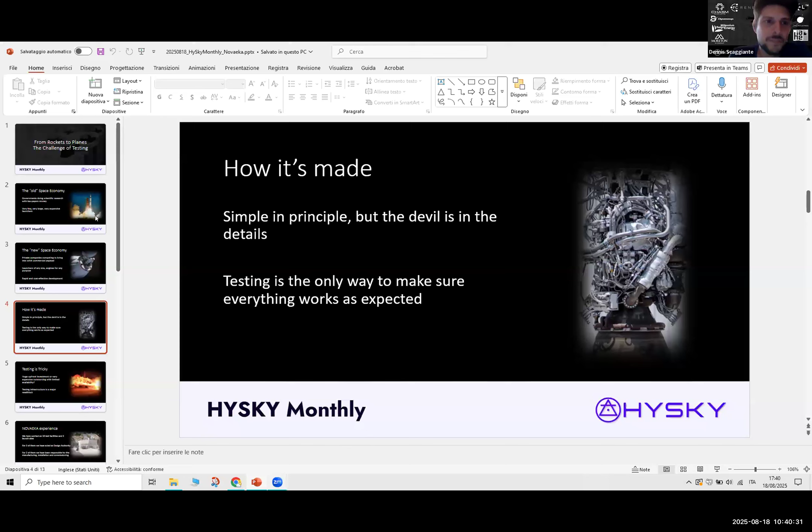So the topic of my talk would be from rocket testing to basically testing special components for aviation. And I'm gonna talk a lot about space in this talk here because it's what we do primarily.

For a long time, access to space was just for governments doing scientific research with taxpayers' money. The main objective of sending stuff or people into space was the exploration of other planets and doing scientific discoveries. So basically, up to 20 years ago, the space economy was very limited and almost exclusively dominated by governments. Governments gave contracts to private contractors to develop technologies that then were used by governments themselves.

In this context, it's only natural that there were just a few very expensive launchers, launch vehicles, and each one was essentially controlled by a different government. The launches were very sporadic, very expensive, and the payload was almost always of scientific nature.

Everything changed when companies like SpaceX proved that it was possible to dramatically reduce the launch cost, thus opening the opportunity for using space for commercial applications. The commercialization of space has led to an exponential increase in the number of satellites that are put into orbit and an exponential increase in launch service demand.

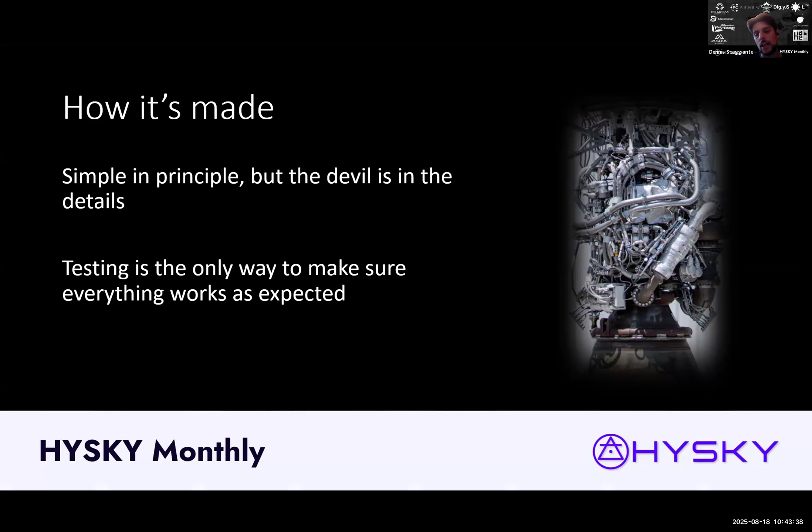The principle behind a rocket engine is pretty simple, to be fair, but the reality, the devil is in the details, so the reality is very, very difficult. The physics that takes place inside an engine is so complicated, non-linear, extreme that all the simulations in the world cannot replace the value of real life data. So testing a rocket engine is absolutely a priority, but it is a major roadblock.

So there are basically two ways you can go to tackle this problem. One way is just investing the money required to build your own proprietary test infrastructure. This is often difficult for new space startups to justify to their investors and can be a serious challenge. Imagine you have a team very focused on developing a very complex product like an engine, and all of a sudden you want to do real tests, so you have to invest time and money to develop a completely different system, the testing system, and so you have to defocus your activities, and face lead times up to 18 months to get a facility from design to commissioning to up and running.

And so it's a serious bottleneck.

The other way, of course, is outsourcing. There's plenty of institutions that provide high quality testing services. You have NASA in the US, we have DLR in Europe, and they work perfectly for maybe final acceptance testing or qualification testing, but they suffer a lot from these problems. The first one is low availability. If you are lucky, you can get maybe a couple of testing months per year, at least here in Europe. And this is way less than needed, especially during the design phase of an engine.

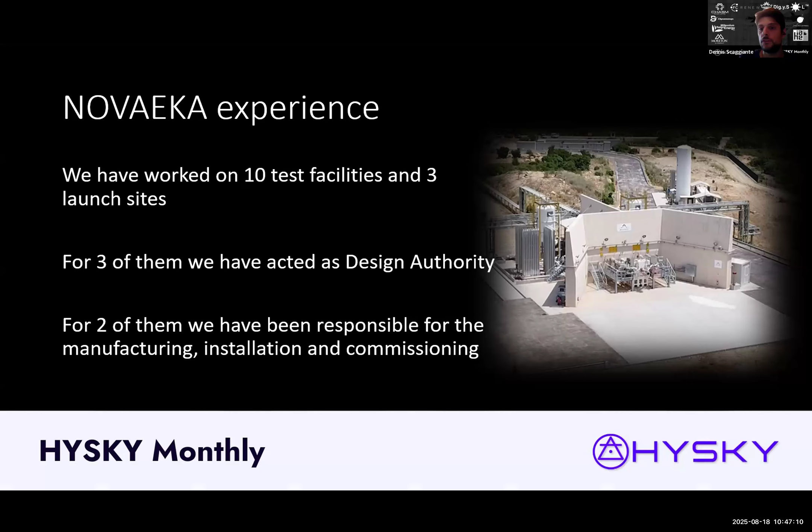For 2 of them, we have acted also as general contractors for the construction, so we have taken the responsibility of delivering the finished product to the client. And we have also worked with systems for fueling launchers with cryogenic fluids. We have a good track record, and we have facts to show it.

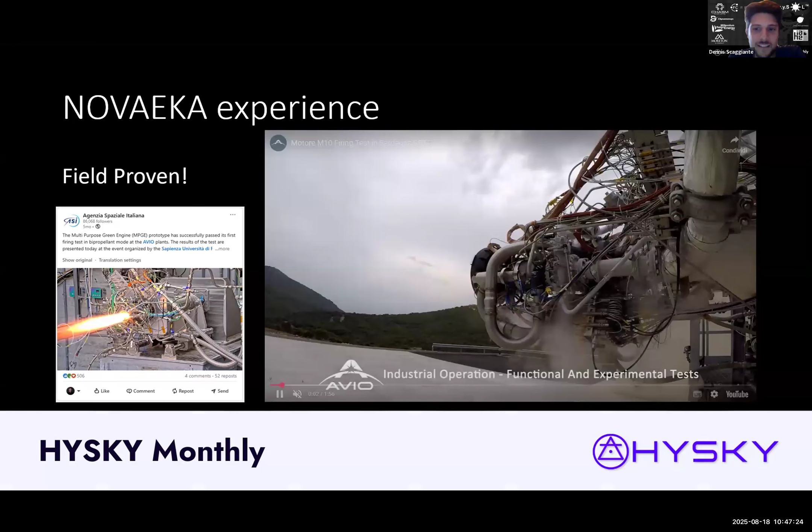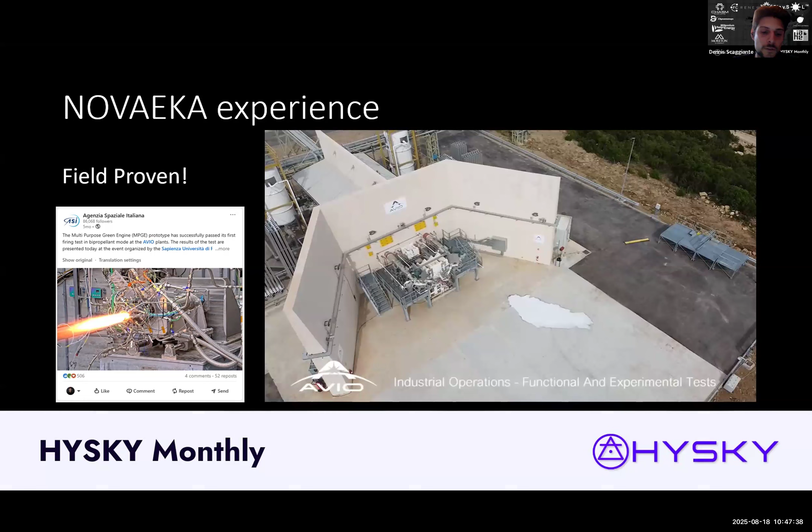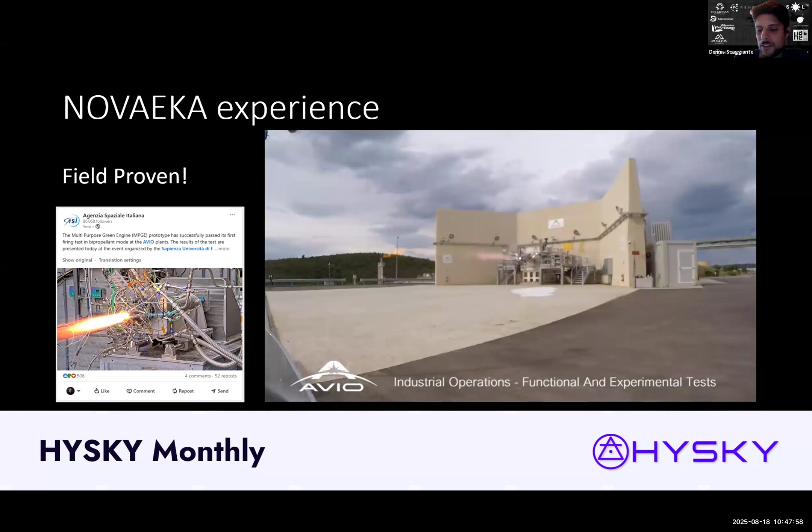So I'd like to show this little video of Avio. This test here is from a 100 kilonewton liquid oxygen, liquid methane engine, and it was tested in this facility that you see, designed by us in 2019 and 2020. So it's pretty cool to see it working, and it's pretty cool to see that the work we do actually ends up making a real impact.

So up until now, we have always focused and worked on specific requirements from each client. They give us requirements, we formulate a design, they review and customize it, and the facility gets built and done. However, after doing 10 of them, we have understood that there is a lot of space for standardization, and this could lead to a lot of cost saving.

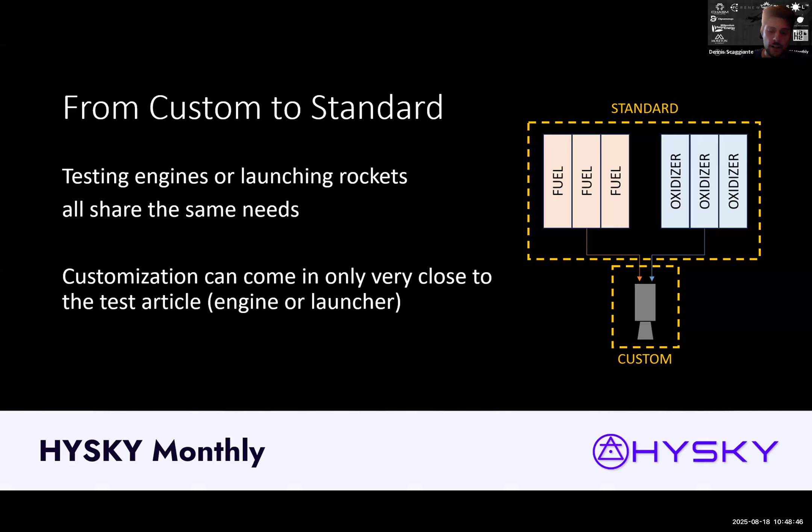If you think about it, all launchers or engines share a few basic requirements. They need a certain amount of fuel, at a certain flow rate and a certain pressure. And all of these basic functions can be standardized and made modular. Another great thing with portability: if you are designing and building a small engine, it would be ideal to be able to perform the final test before integration into the launcher, and to use the very same equipment you used for the development and acceptance testing.

If instead you are building a launcher, it will be very nice to be, let's say, spaceport independent, so being able to launch from every spaceport out there around the world, and you could take your equipment with you to refuel your launcher.

Putting all of these together, this is our solution, at least the idea we have: a portable modular fluidic subsystem that can be assembled to create a complete testing facility, as shown here in the slide, or with minor modifications, a fueling system for launches. The idea is to transform something that now is really time consuming and expensive to have into something that is almost an off-the-shelf component.

And we are working on this. We have two potential clients in Europe. One is an engine manufacturer, and one is a launch manufacturer. And we have also one potential client in the US.

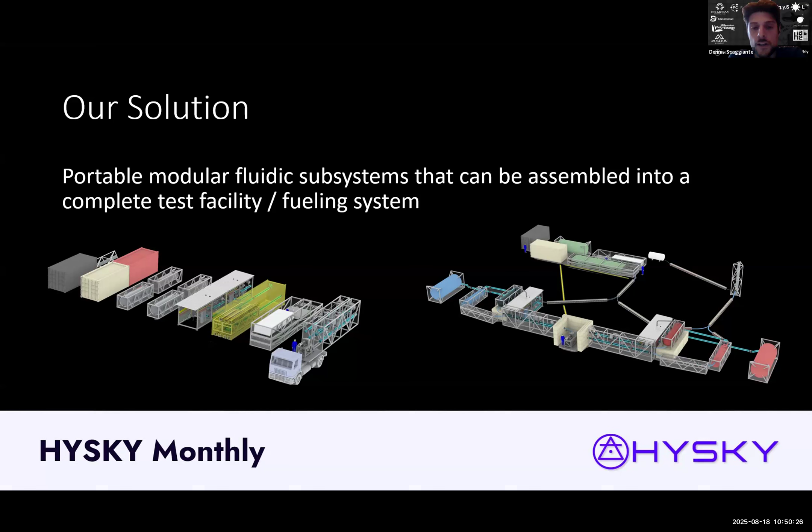So finally, we come to hydrogen. I didn't mention hydrogen anywhere so far, but the idea is very simple: do the same thing for hydrogen. So developing valves, pumps, or other kinds of fluidic equipment for liquid hydrogen or gaseous hydrogen requires a lot of testing. The scale of these tests is probably much smaller than we are used for the engines.

So that's for the better, because usually it becomes less costly. And the idea is the same: have a portable and modular testing equipment for performing tests on liquid hydrogen or gaseous hydrogen components. We are actually already working on something like this, and the render there is exactly the system we are working on for an Italian institution.

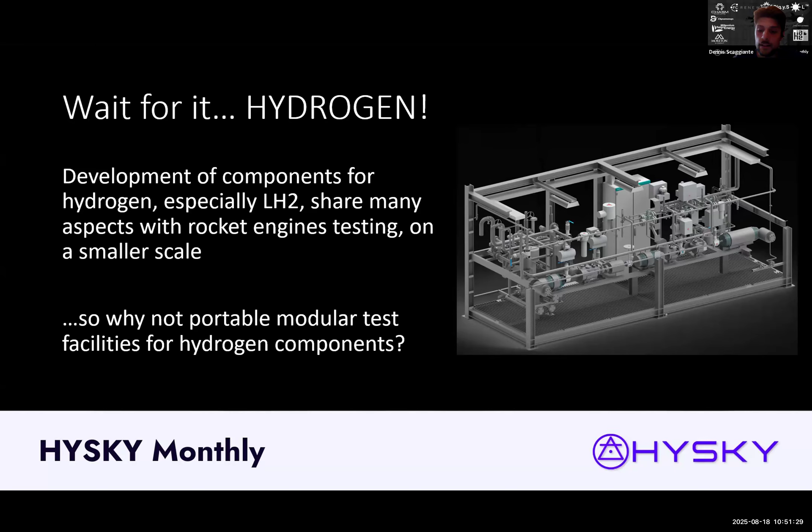So share your needs. If you have troubles with testing, and if you want to share with us some high-level requirements, maybe we could already have something that saves you a lot of time and a lot of money. So thanks.

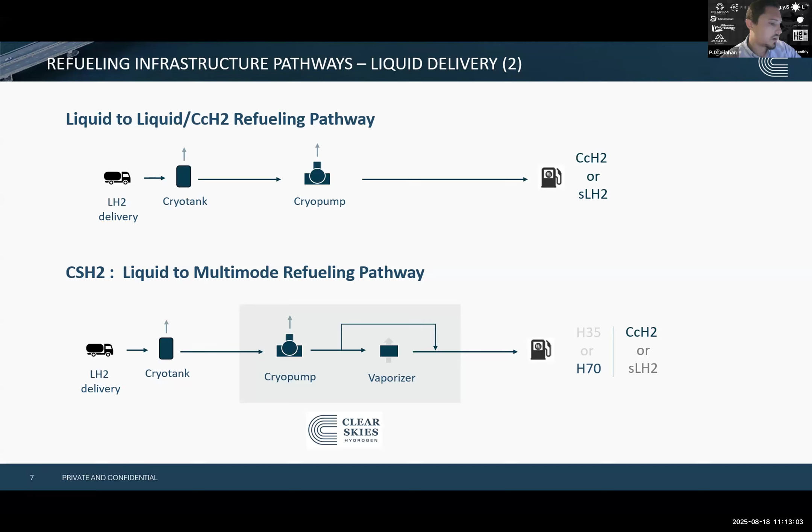As I mentioned, scaling the offtake for hydrogen has always been really challenging, largely due to these fuel costs. Right now, many of the small fleets are using distributed gas in the form of tube trailers. When we would set up prototype demos back with CTE, that's often how we would run things. If it's one or two vehicles, you'd get a tube trailer and just dispense that right into the vehicle, or you could use a compressor as well to squeeze a bit more out of that tube trailer. But really, it's small scale levels of equipment, and it gets really expensive once you start looking at getting a delivery of these trailers every single day to keep your fleet running.

To give you a sense of scale, one of these tube trailers can hold about a ton of hydrogen, enough for a few vehicles to run per day. But if you want to achieve more meaningful levels of scale, you're going to need liquid, which is four times the amount per load. So tanks carrying liquid can carry four tons instead, effectively cutting your delivery costs by four by using liquid.

And we see liquid as really kind of the stepping stone into pipeline gas eventually. In order to justify the build out of pipeline gas infrastructure, we need to achieve meaningful levels of deployment and industry scale on the vehicle side, which we think liquid is really key for, sitting right in the middle between tube trailers and the pipeline infrastructure down the road.

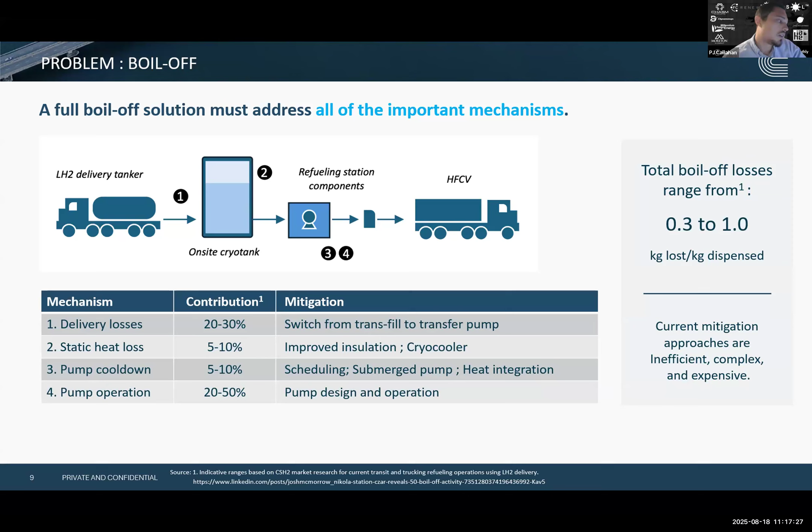Collectively, we're estimating a significant amount of hydrogen is lost, between 0.3 to a full kilogram per kilogram dispensed. So almost 50% of the fuel coming in is being lost through one of these four mechanisms. That depends somewhat on station utilization, but that's why you have such a large range. This is a significant amount of fuel, and it's really driving fuel costs up for the liquid hydrogen market.

So we at CSH2 are developing technology to attack some of these core issues of boil off with a purpose-built clean sheet cryopump design, going after mechanisms 3 and 4 initially that are due to the cool down and operation of the pump itself. We've designed a purpose-built cryopump specifically for operation with liquid hydrogen. It's designed to be low cost and very easy to maintain to overcome limitations of current pumps, with significant reduction in CapEx and OpEx.

Combine this with our direct fill architecture approach, and we can dramatically reduce the station footprint, going from a concrete pad that would normally take up 100 by 50 feet or so - we can shrink all that equipment down into a 20-foot shipping container. This also dramatically improves station flexibility and cuts down on construction timelines, making it possible to establish a networked approach of standardized fueling stations.

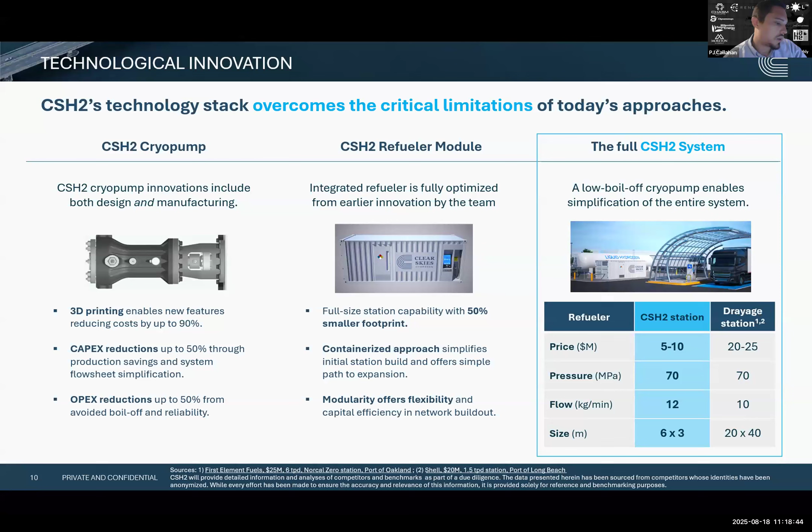With this approach, we think we can get a full station down from between 20 and 25 million, as we've seen some stations creeping up, down to about 5 to 10 million. There's a significant reduction in capital expenditure when you eliminate the cascade refueling, the refrigeration units, and purpose-build your cryopump. There's quite a bit of savings we can see.

And then finally, we're going after the transit and trucking markets initially, as they have the highest TRL on the vehicle side, with operators very eager to adopt, especially with the regulations in California for transit operators. But we are very eager to explore other applications as well.

So we can fill those tube trailers I mentioned that can support small scale demos in 900 bar or 500 bar, and our equipment's very effective for doing that. You can tap into the existing liquid hydrogen infrastructure to refill those trailers, supporting applications where they may not have space or power for a permanent station - you can set up tube trailers and do initial demos of vehicles or other equipment. We can also refill the CCH2 vessels directly as well. We're excited to explore some of these emerging markets for H2 delivery.

If there's any opportunity or interest in follow-up and discussions for partnership in any of these applications, we'd be happy to connect. That's all I had - thanks so much, and happy to address any questions.

Thanks so much, PJ, that was fantastic. I have a quick question - Mike, I'll call on you in just a minute. Can you go back to the previous slide? You probably explained this, but what is CCH2 and CSH2?

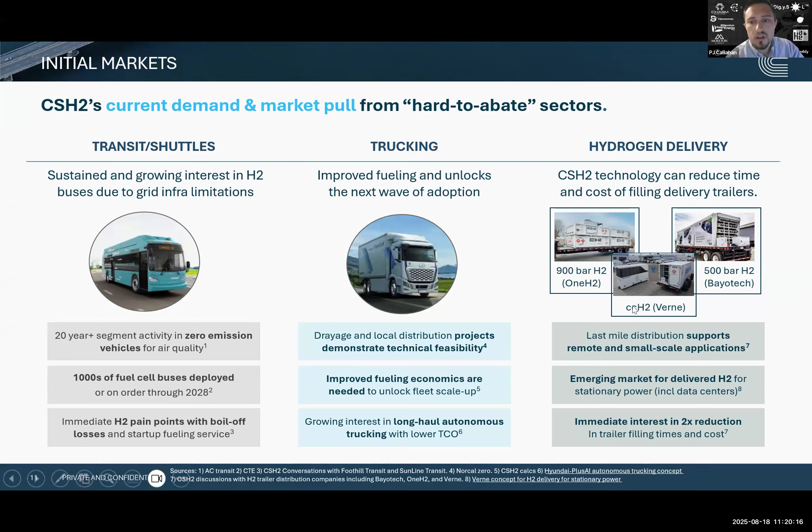CSH2, ClearSkiesH2, is just short for our company name. I said that in your bio. CCH2 - if I go back to the original slide here, it's probably the easiest way to explain it. CCH2 stands for cryocompressed hydrogen. Got it - so you see it referred to as number 3, cryocompressed hydrogen, a high density form of hydrogen that's very cold.

So, 54 Kelvin, and high pressure stored at 350 bar.

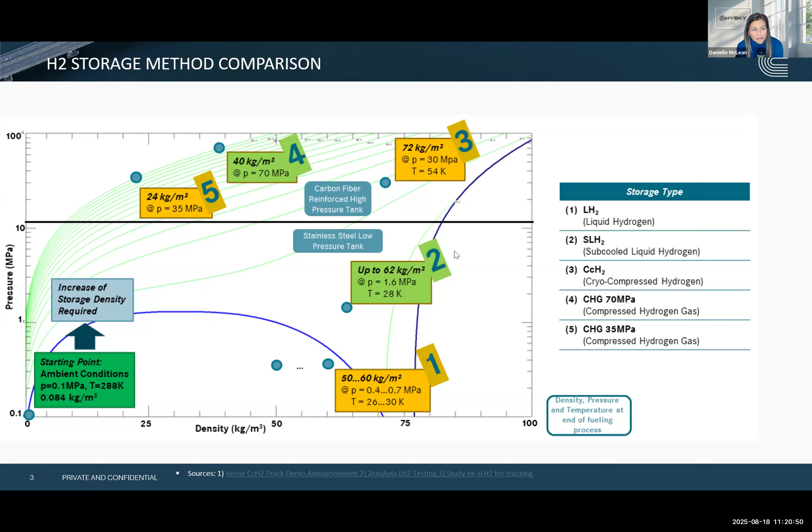Is Verne working on this? Are you guys partnered with them? I noticed they were in one of those pictures, I thought I saw them in one of your slides. We are exploring opportunities with them, to directly fill from our pump, the outlet of our pump, into their vessels.

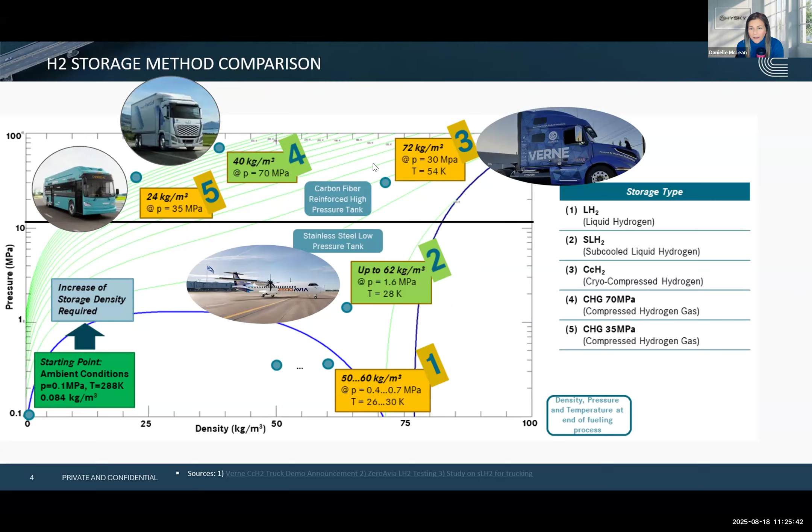PJ, could you go back a couple more slides? I want to make sure I understood something you said. Keep going back—it's the one where you talk about the pipelines. Oh, here?

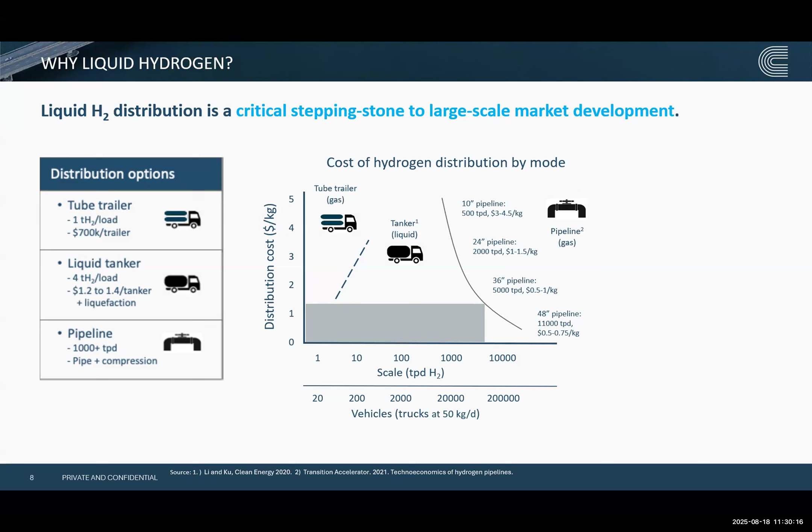Definitely. So the simpler the station, the cheaper it'll be from a capital perspective. The first design is really a legacy design, from before we had developed a lot of our cryopumps. This is what a lot of stations look like, where you vaporize the hydrogen coming out of the cryo tank and then put it into a compressor. Compressors are very expensive to operate and can be somewhat unreliable at larger scale.

The second option moves towards a cryopump, which is a little more effective for liquid itself. But the key cost driver here is the cascade storage and refrigeration units, which take up a lot of space - and the storage tanks take up a lot of space too, which is additional land cost. The refrigeration is very costly and can also be pretty unreliable from what we're seeing.

So if you take those out using smart controls on your cryopump - being smart about the way you use the discharge from your cryopump - you can blend the streams coming out of the vaporizer and the pump itself to use some of the cooling duty of the hydrogen coming out of the cryopump. That's just a process design change instead of an equipment change, which is cheaper, so it reduces the effective fueling cost as well. This is a newer technique our co-founders pioneered at our last company. We don't see a lot of existing infrastructure using this type of technique yet, but it's one we're integrating that we think will dramatically shrink the station cost and footprint.

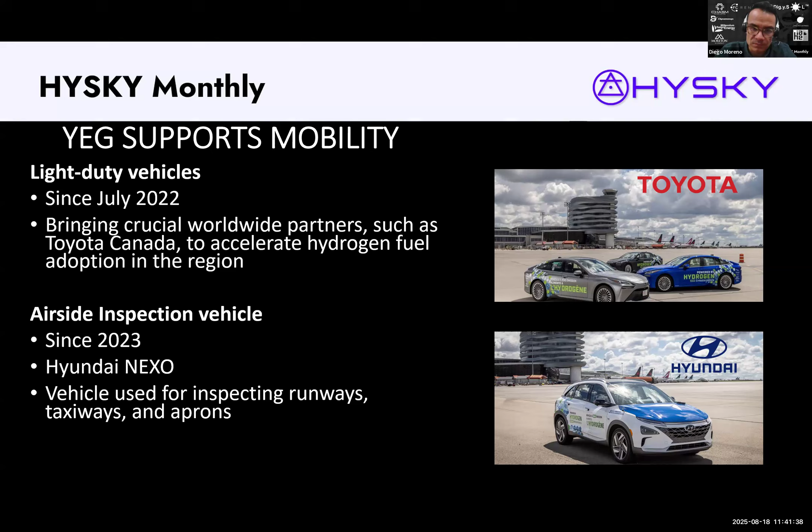As well, we have our hydrogen refueling station. This is a temporary one, through a partnership with Air Products, a very reliable hydrogen production technology provider that we have around. And that is something very important.

We have seen, and we know, that there are a bunch of very cool technologies around, but they are at low TRL. And as you know, an airport can never fail. That means reliability is everything for us. So we need to have a plan A, B, C, D. You will never see an airport shut down because plan A failed.

So for us, we need to secure that the hydrogen supply is going to be constant and totally reliable. That's why we have this partnership with Air Products, and they have been very stable in terms of supplying hydrogen for us. Of course, we are identifying what the learning curve has been, and we are working on other projects in order to supply hydrogen from the land itself as well.

So with this hydrogen, it's gaseous hydrogen that comes in cascade mode. It's not the ideal one, as you know. So we have a very interesting project that we would like to expand further, but realistically, this is what we have right now.

As we know, liquid hydrogen is very expensive these days, and if we don't have a stable demand, that is the problem we have with mobility. So we need to minimize the risk, the financial risk, and minimize the cost. That is why, while adoption is increasing, we are working with gaseous hydrogen.

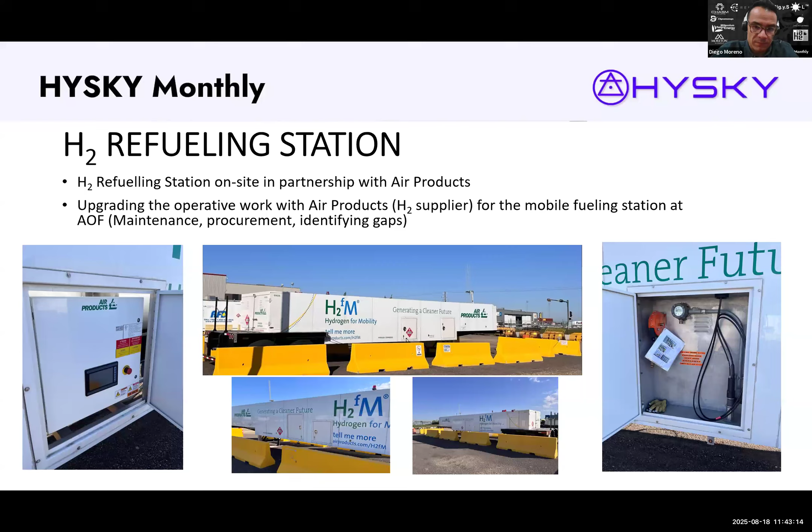Right now we're at the first milestone. The plan is to start running the vehicles probably for the winter, around October or November. So let's see how everything continues, but we are working pretty well - we are aligned with the schedule and haven't had any problems.

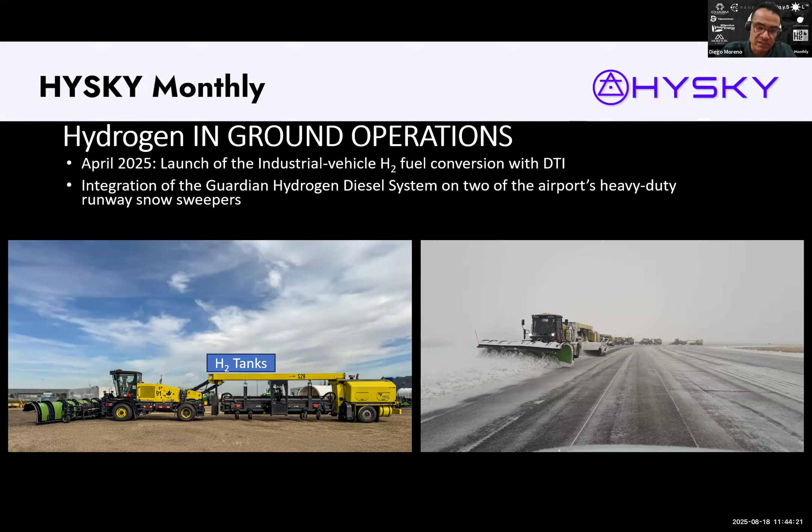And as well, we guarantee the hydrogen supply. That is the main barrier that plenty of companies have - they don't have a stable hydrogen supply in the area. So we have in-situ hydrogen feed for these vehicles.

So why is this important as well? Because hydrogen is one of the cornerstones later on for SAF production. So one of the several technologies for SAF production - we know that SAF is a very tricky point and it's very expensive.

The cost of SAF, sustainable aviation fuel, could be 3 times the cost of regular jet fuel. And here in the area, we would like to promote that.

SAF production with clean hydrogen is very important for us, because we wouldn't need to retrofit the vehicles. We're also very keen to expand airline operations, especially with Europe, where they have more certified mandates. So this is something we're working on, to incentivize hydrogen production from the provincial government as well. SAF is especially important for us, and hydrogen is crucial there.

Recently, the airport joined a consortium called H2 Can Fly. This is a pan-Canadian consortium where several companies like Airbus and NRCan, the Natural Resources Canada Institution, and other important organizations in the area, work in order to promote research and the adoption of hydrogen and create projects related to hydrogen adoption, either for aircraft engines, ground support operations, anything related to hydrogen. We're starting this consortium, and we're very happy to be with them in order to promote this ecosystem even more.